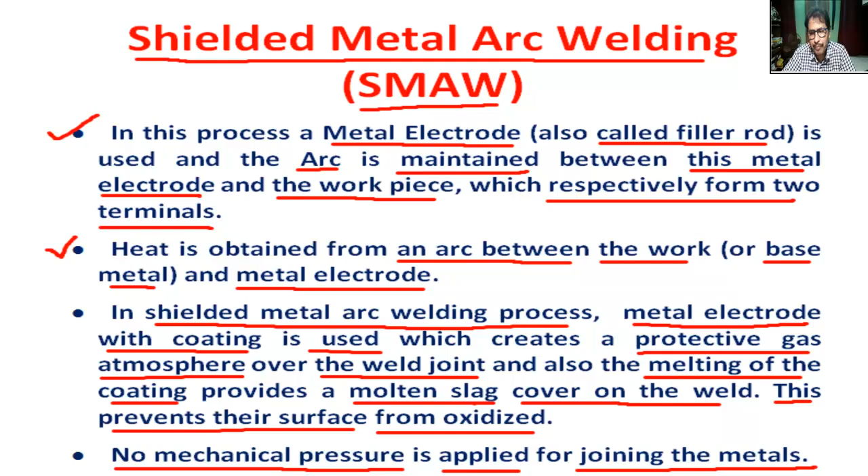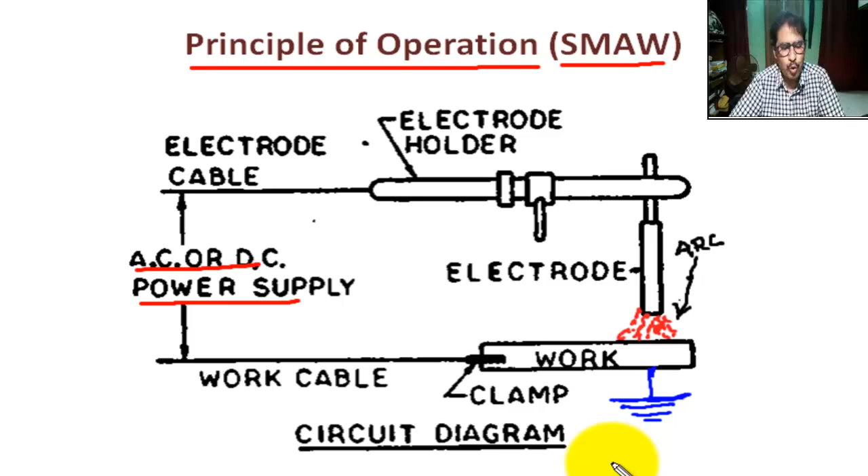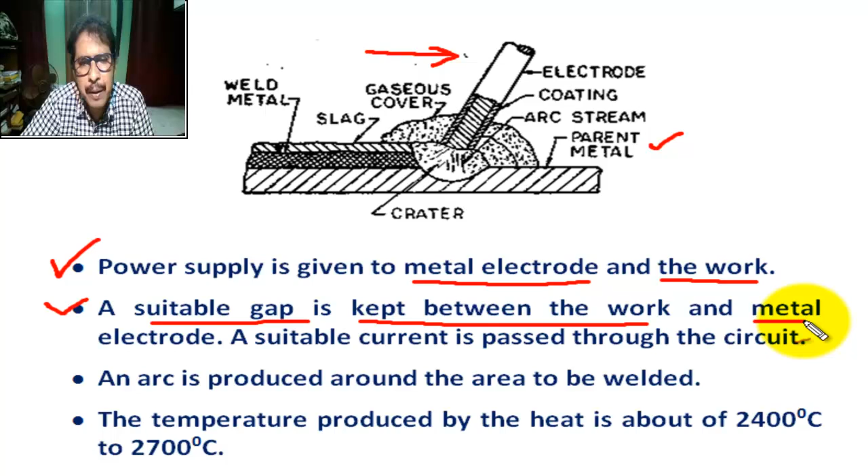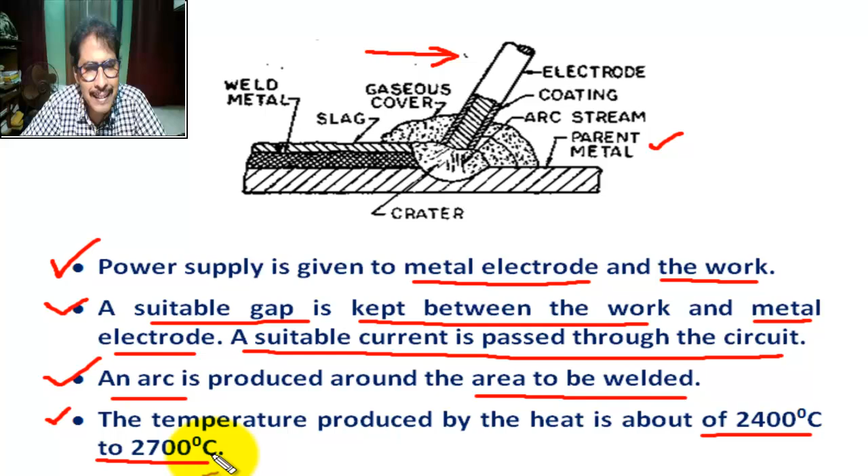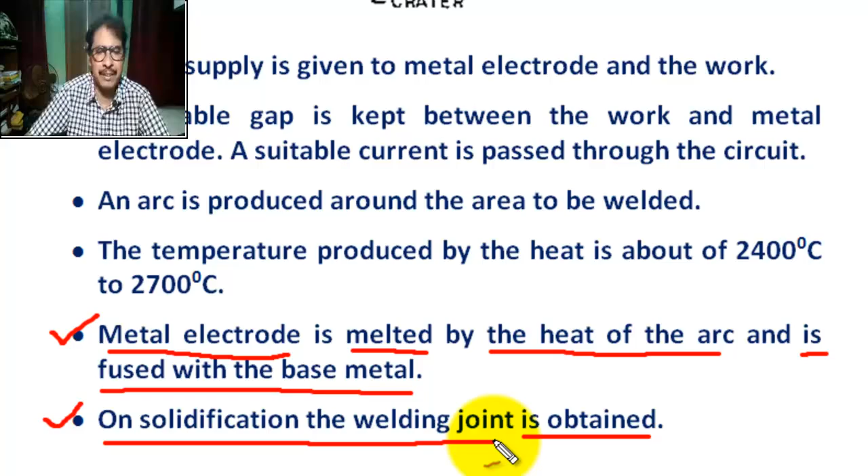power supply is given to the metal electrode and the work. A suitable gap is kept between the work and metal electrode. A suitable current is passed through the circuit. An arc is produced around the area to be welded. Next, the temperature produced by the heat is about 2400 degrees centigrade to 2700 degrees centigrade. Okay, now the metal electrode is melted by the heat of the arc and is fused with the base metal. Okay, next, on solidification, the welded joint is obtained. After solidification, the welded joint is obtained. Okay,

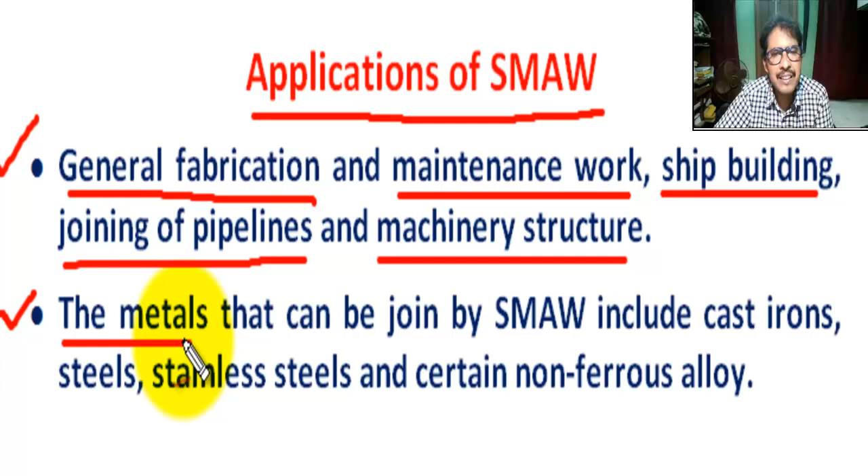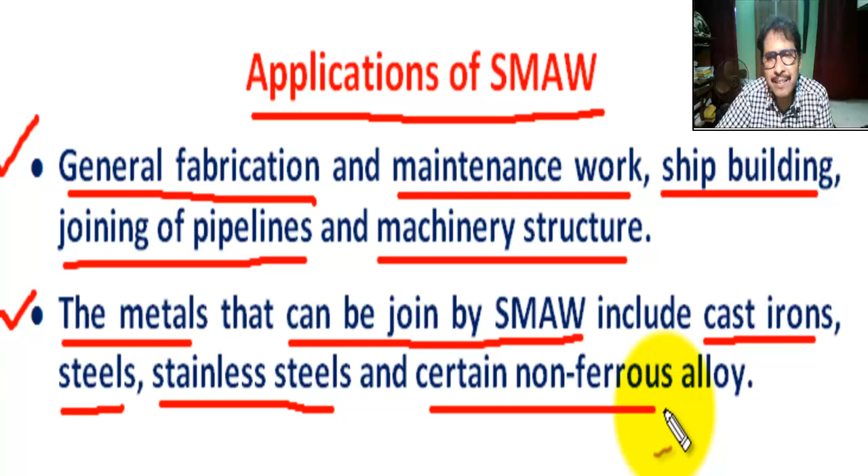now, application of SMAW, shielded metal arc welding. General fabrication and maintenance work, shipbuilding, joining of pipelines and machinery structures. Next, the metals that can be joined by SMAW include cast iron, steel, stainless steel, and certain non-ferrous alloys. Not used for copper alloys. Okay.